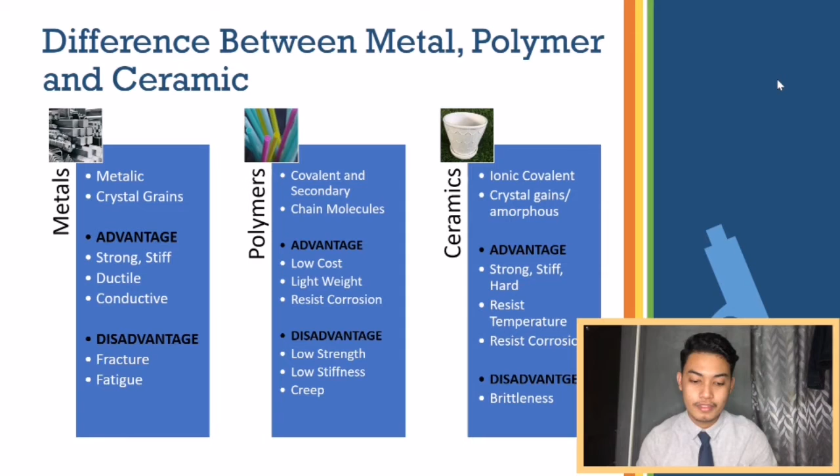Now I will explain the steps to make a pan of stainless steel. The first step is melting and casting. The raw materials are first melted together in an electric furnace. Second step is forming. Semi-finished steel goes through forming operation, beginning with hot rolling, in which the steel is heated and passed through hot rolls. The next step is heat treatment. After the stainless steel is formed, most types must go through an annealing step.

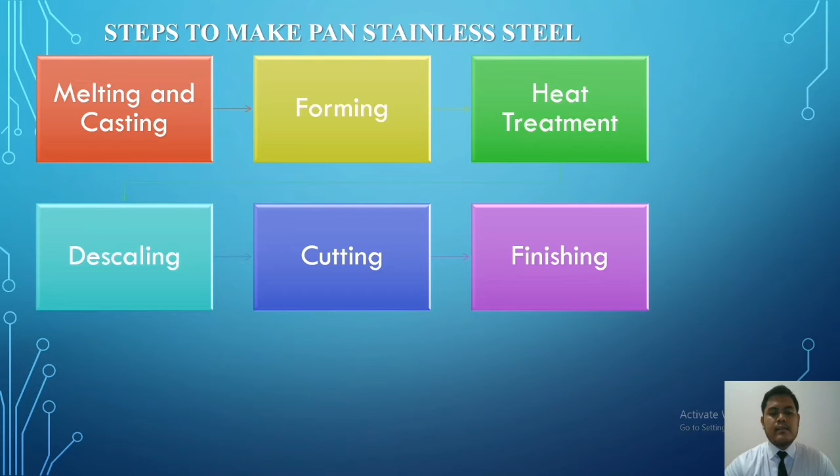The next step is descaling. Annealing causes a scale or build-up to form on the steel. The next step is cutting. Cutting operations are usually necessary to obtain the desired blank shape or size, or to trim the part to final size. The last step is finishing. Surface finish is an important specification for stainless steel products and is critical in applications where appearance is also important.

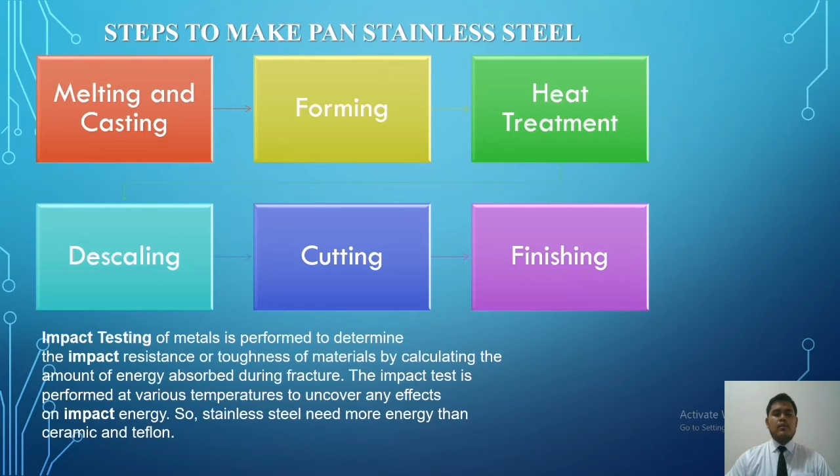In this case, we use the impact test to test the material. Impact testing of metal is performed to determine the impact resistance or toughness of the material by calculating the amount of energy absorbed during fracture. The impact test is performed at various temperatures to uncover any effects on impact energy. So stainless steel needs more energy than ceramic and Teflon.

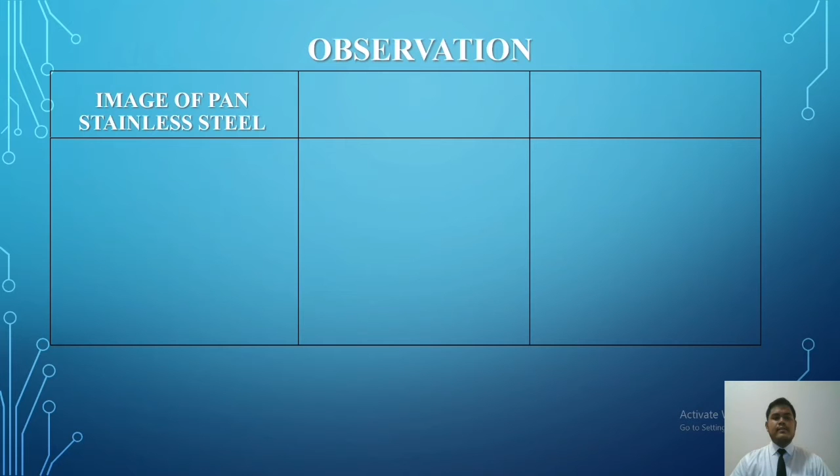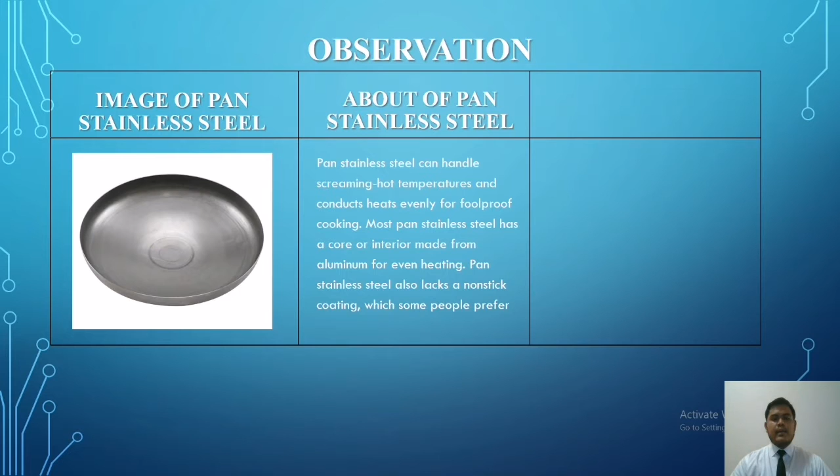Next is observation. This is the image of the pan stainless steel. The next is about of pan stainless steel. Pan stainless steel can handle screaming-hot temperatures and conduct heat evenly for foolproof cooking. Most pan stainless steel has a core interior made from aluminum for even heating. Pan stainless steel also lacks a non-stick coating, which some people prefer. Next is properties of stainless steel: it's strong, it's rigid, it's hard, and lastly, it does not rust.

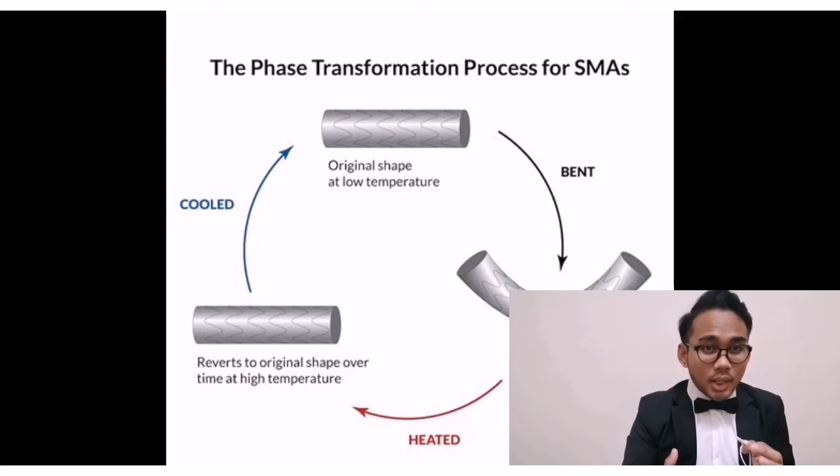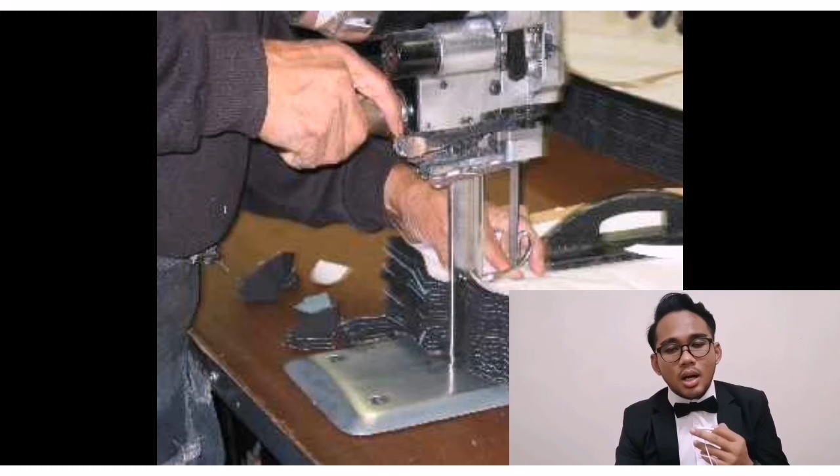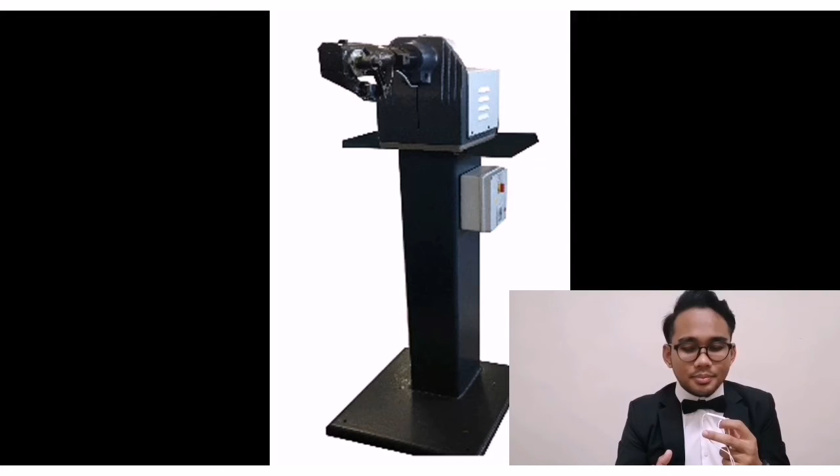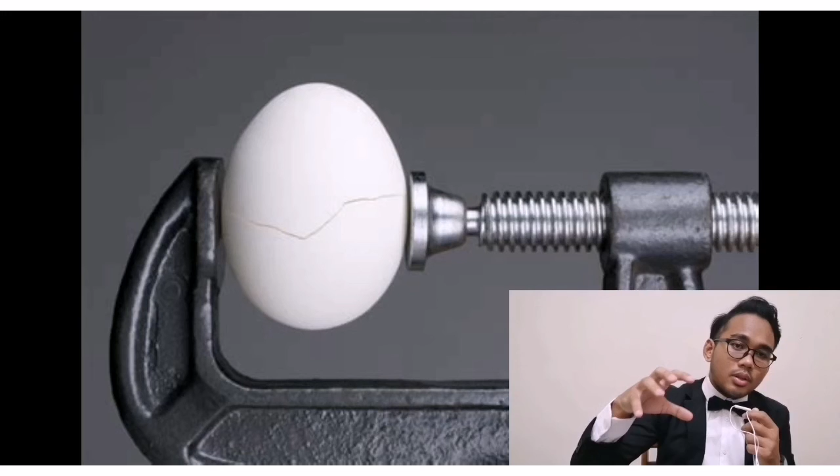After that we need to trim the aluminium to the shape we want. Next process, we need to squeeze the platform with 120 tons of pressure to make the pan. We apply the pressure, and there is leftover material around the circle. That leftover we reuse again to make a new Teflon finishing part, which we color and rename with a brand, and then the process of making Teflon is completely finished.

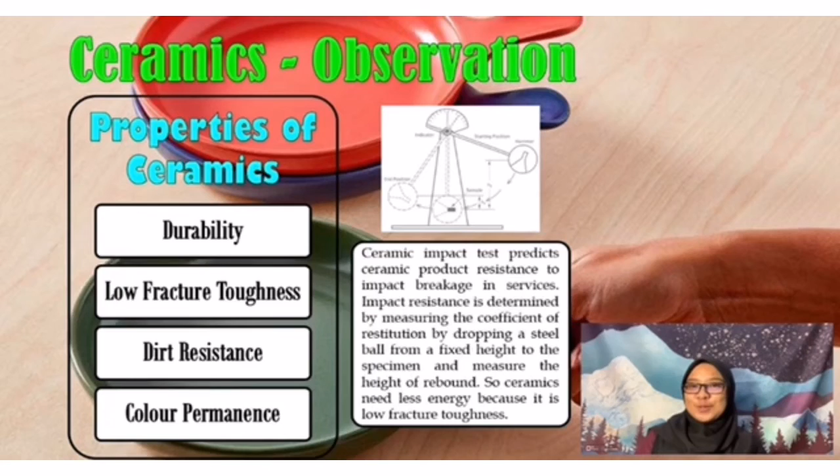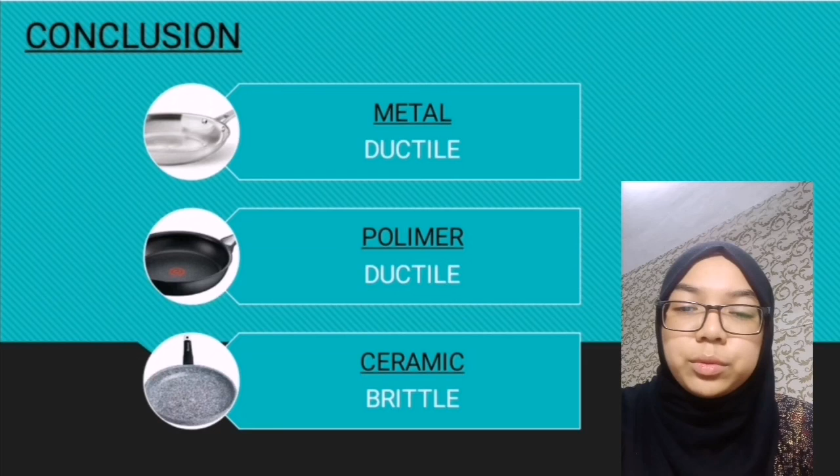Today I will conclude the experiment we have done. For this experiment, we use the Charpy impact test because we want to know the toughness of the test material. The Charpy test also shows whether the material can be classified as brittle or ductile. For this experiment, we concluded that ceramic is brittle because of huge electrostatic repulsion which inhibits rows of ceramic atoms from sliding past other rows.

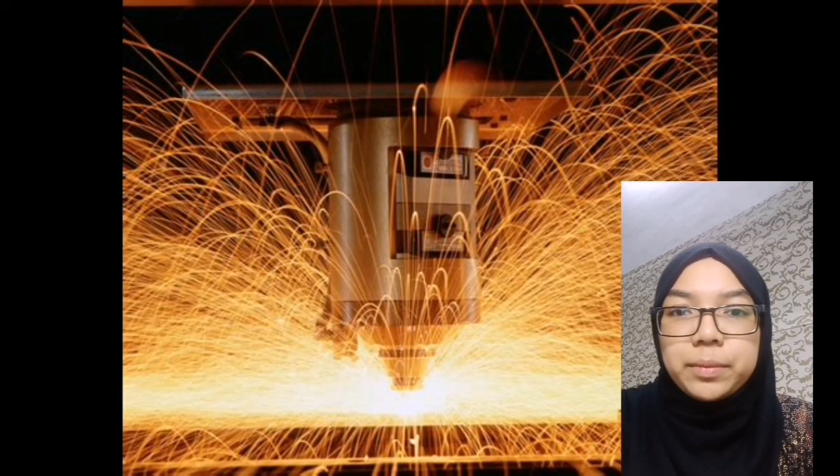Since in ceramic the rows cannot slide, the ceramic cannot plastically deform. Instead it fractures, which makes it a brittle material. In metal, the sliding of rows of atoms results in slip, which allows the metal to deform plastically instead of fracturing. For polymer, it is very similar to metal, where elastic deformation takes place first, followed by yielding and plastic deformation. So both polymer and metal are ductile. Thank you.